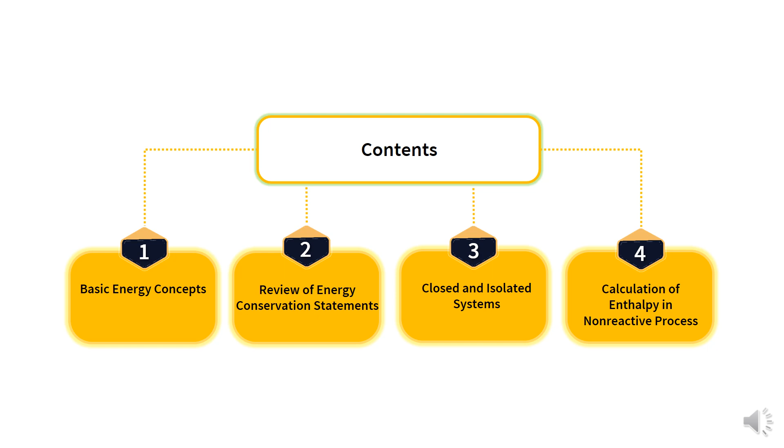In the previous segment, we already discussed the basic energy concept, and in this segment, we will discuss the review of the energy conservation statement. The total energy of a system is always conserved.

The conservation equation for total energy is a mathematical description of the movement and accumulation of total energy in a system of interest. And the law of the conservation of total energy states that total energy can be neither created nor destroyed, but only converted from one form into an equivalent quantity of another form of energy.

Although total energy is conserved and remains constant in the universe, specific forms of energy, such as mechanical and electrical energy, are not conserved. Instead, different forms of energy can be interconverted from one type to another.

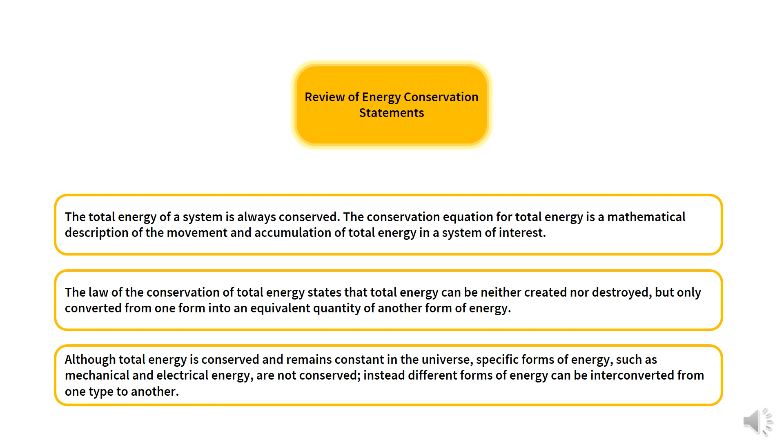Consider the system shown in the figure beside. The rates of mass entering and leaving the system have associated energy rates. That is the energy rate at the inlet and also the energy rate at the outlet. The energy crossing the system boundary can be in the form of internal, kinetic, and/or potential energy, and the rate at which flow work enters or leaves the system depends on the movement of mass across the system boundary.

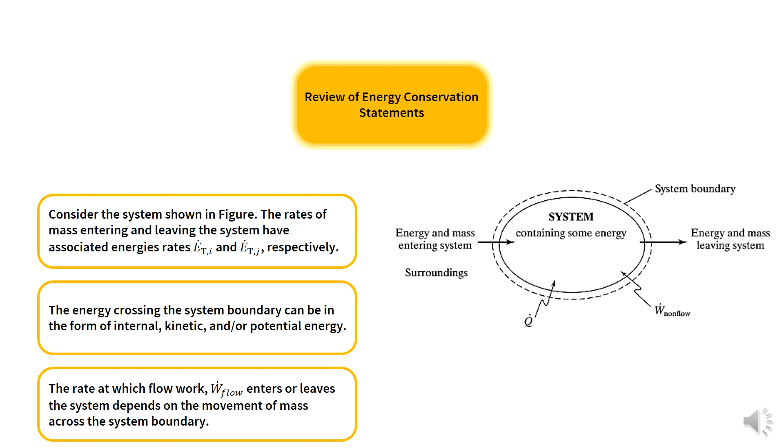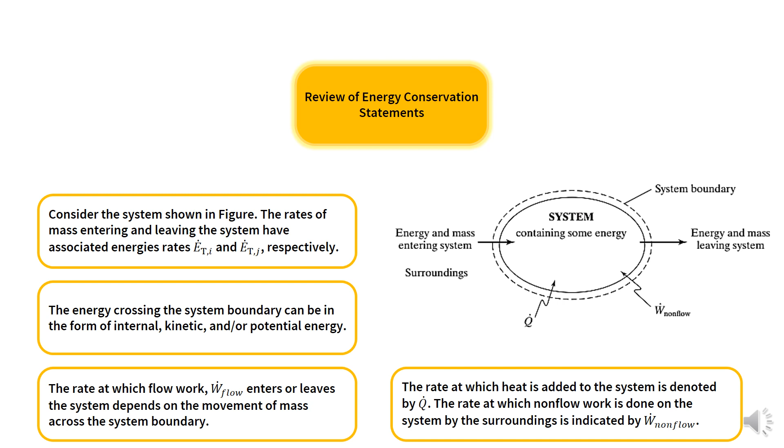And the rate at which heat is added to the system is denoted by Q. The rate at which non-flow work is done on the system by the surroundings is indicated by the work non-flow. The generic conservation equation is written to account for the movement of total energy into and out of the system by bulk mass transfer and for the transfer of heat and work across the system boundary.

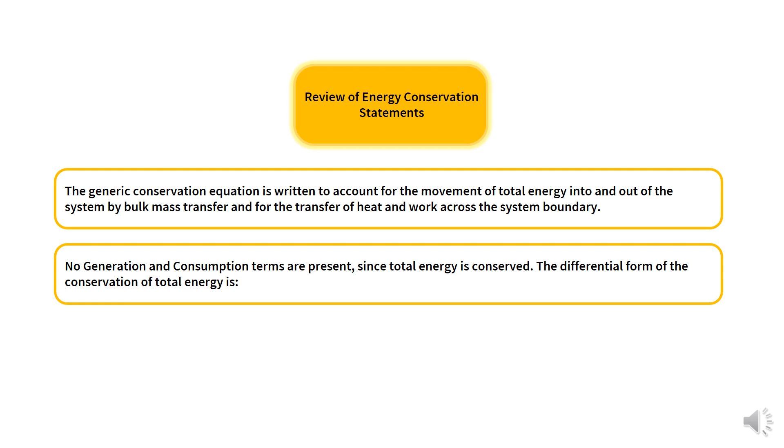And no generation and consumption terms are present since total energy is conserved. And the differential form of the conservation of total energy can be seen in this slide. Since total mass but not total moles is conserved in all systems, the development of the conservation of total energy equation is presented by using mass and mass rates.

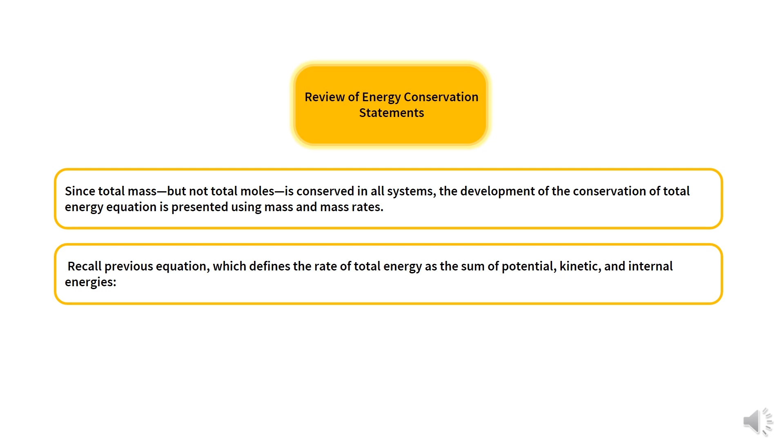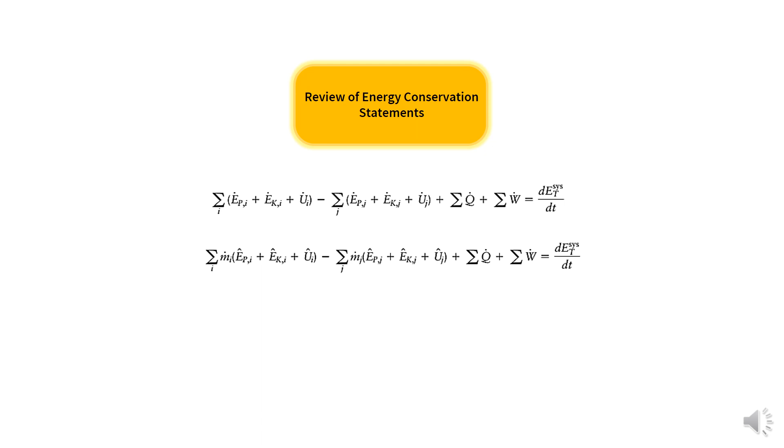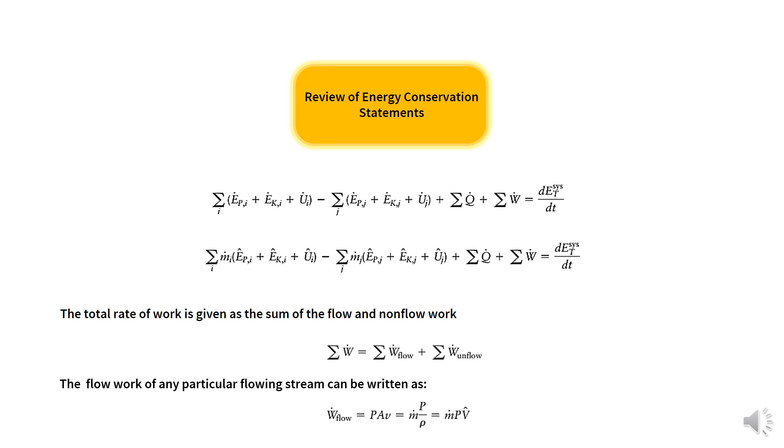And recall the previous equation in the previous segment. The rate of total energy is defined as the sum of potential, kinetic, and internal energy, as can be seen in this slide. The previous equation can be written in the form of this equation, and also we can write the total rate of work as the sum of the flow and non-flow work, and the equation can be seen in this slide. And the flow work of any particular flowing stream can be written as this equation.

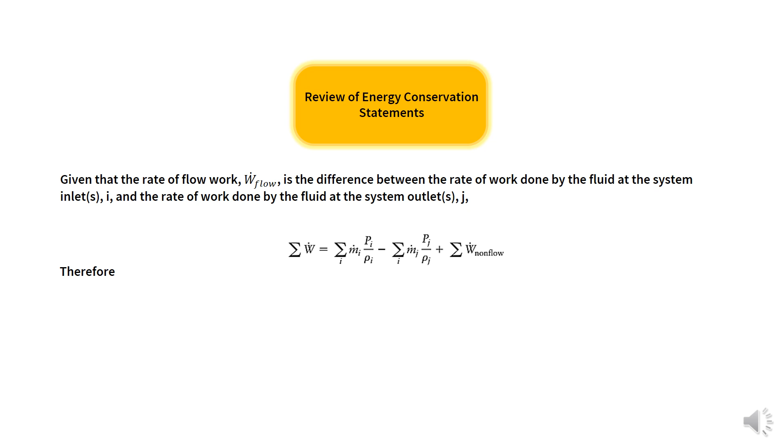Given that the rate of flow work is the difference between the rate of work done by the fluid at the system inlet and the rate of work done by the fluid at the system outlet, the rate of flow work can be written as the following equation, where this one is the work flow by inlet, this one is work flow by outlet, and this one is the sum of rate of non-flow work. So from this equation we can write it in the other form as the following equation below.

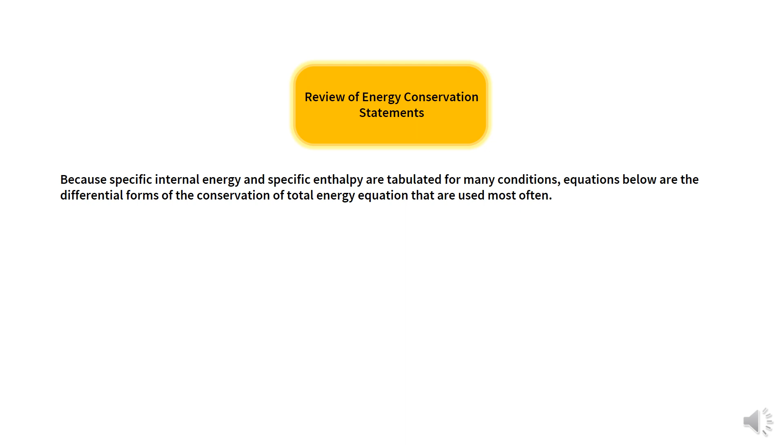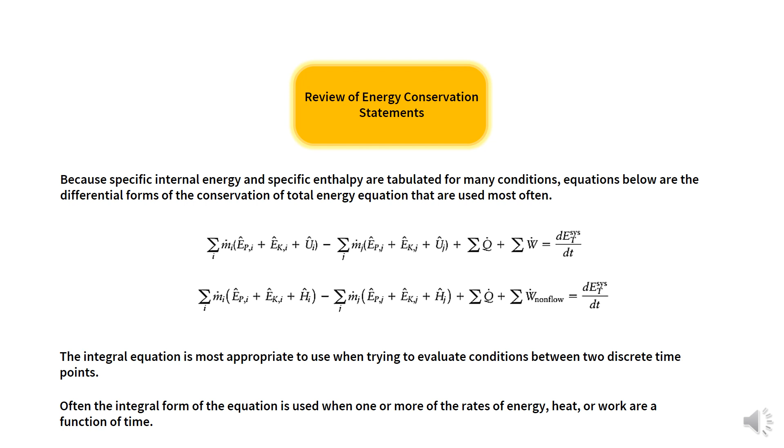Both specific internal energy and specific enthalpy are tabulated for many conditions. Equations below are the differential form of the conservation of total energy equation that are used most often, and the integral equation is most appropriate to use when trying to evaluate conditions between two discrete time points. Often, the integral form of the equation is used when one or more of the rates of energy, heat, or work are a function of time.

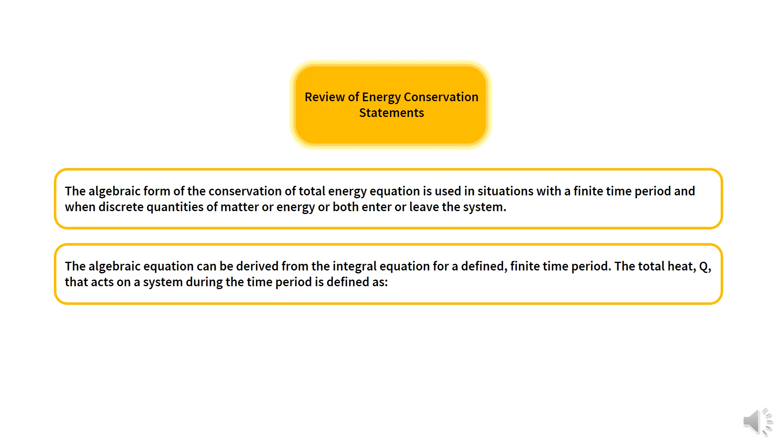Also, the algebraic form of the conservation of total energy equation is used in situations with a finite time period and when discrete quantities of matter or energy or both enter or leave the system. The algebraic equation can be derived from the integral equation for a defined and finite time period, and the total heat Q added to the system during the time period is defined as the equation below.

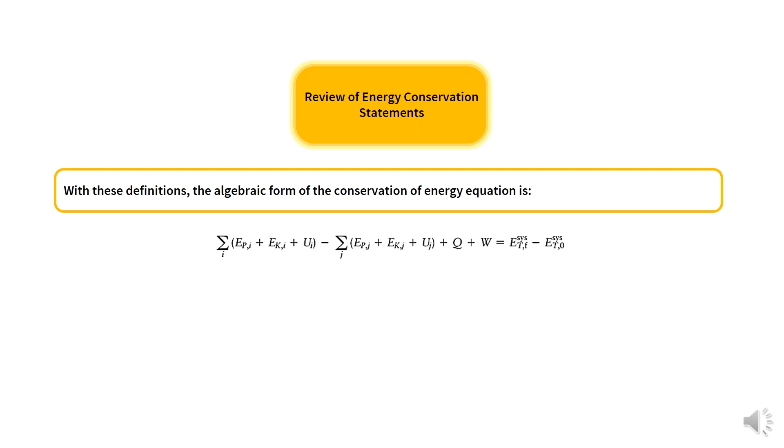With this definition, the algebraic form of the conservation of energy equation can be seen in the following equation, where E_sys,tf and E_sys,t0 are the total energy of the system at the final and initial condition. And the different forms of energy written in terms of specific energy can be seen in the following equation below. And the substitution for the total amount of work and the definition of enthalpy result in another common form of the algebraic conservation of energy equation that can be seen in this last equation.

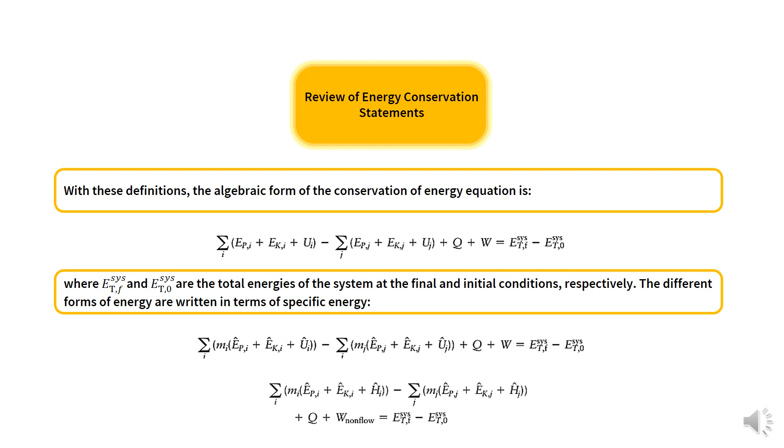Mass accounting or conservation equations may need to be developed along with the energy conservation equation, depending on the complexity of the system. Coupled mass and energy equations are used most often when considering a steady-state system. For the next segment, we will discuss the closed and isolated system.